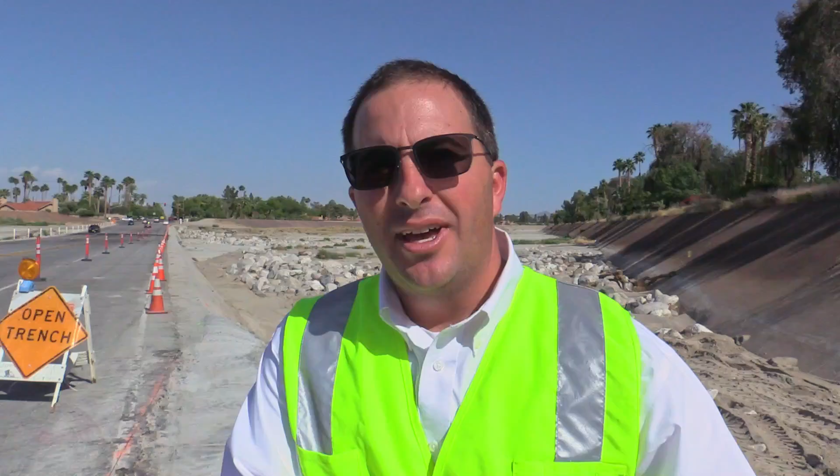Hi everyone, my name is Jesse Eckenroth, and I serve as the Public Works Director for the City of Rancho Mirage. Today we're on site at the Whitewater Storm Channel, on Frank Sinatra Drive low water crossing as it goes through the channel.

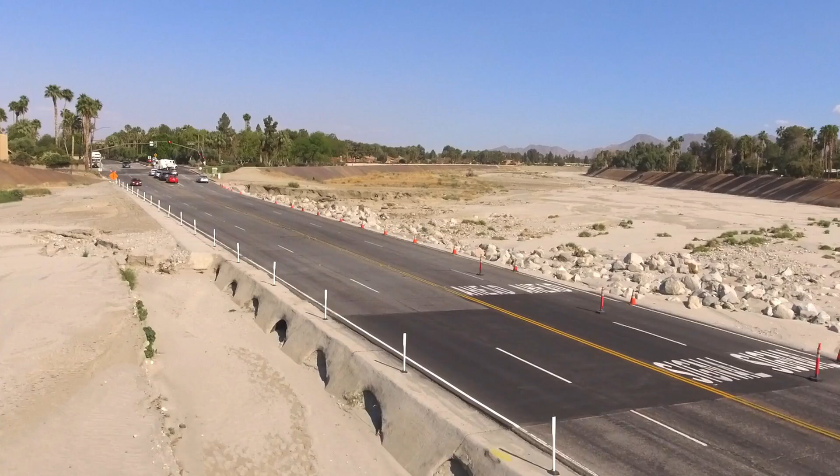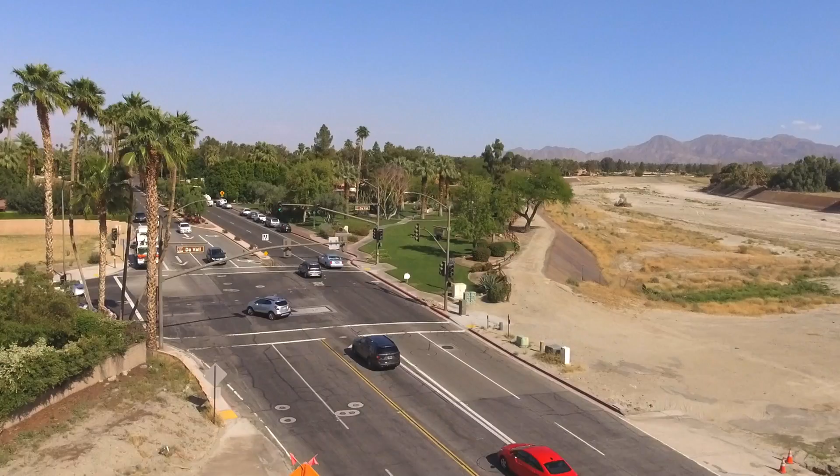Currently there's 16 pipe culverts under Frank Sinatra Drive that convey storm waters during a storm event under the roadway. The recent Valentine's Day flood was too much for the pipe culverts to handle, and Frank Sinatra Drive was overtopped with water. While it was overtopped, it sustained some damage to the roadway, so we thought this was the perfect opportunity to give everyone a status update on the proposed Frank Sinatra Bridge Project. The bridge project will lift the 4 lanes of traffic that run through the channel safely up out of harm's way of future floodwaters.

Valentine's Day 2019, we had some pretty tremendous storms that came through Rancho Mirage, and it put everyone's focus once again on the Frank Sinatra low water crossing, which during major flood events gets overtopped, and the city has to close that roadway down to protect motorists from driving over that low water crossing. So good timing to give an update on the Frank Sinatra Bridge.

I wanted to touch on the current design and funding status as of March 21st, 2019. My name is Jesse Eckenroth. I serve as the Director of Public Works, and I am the project manager for the bridge. So this is just an informational piece really to give everyone an update on where we are standing on the bridge right now.

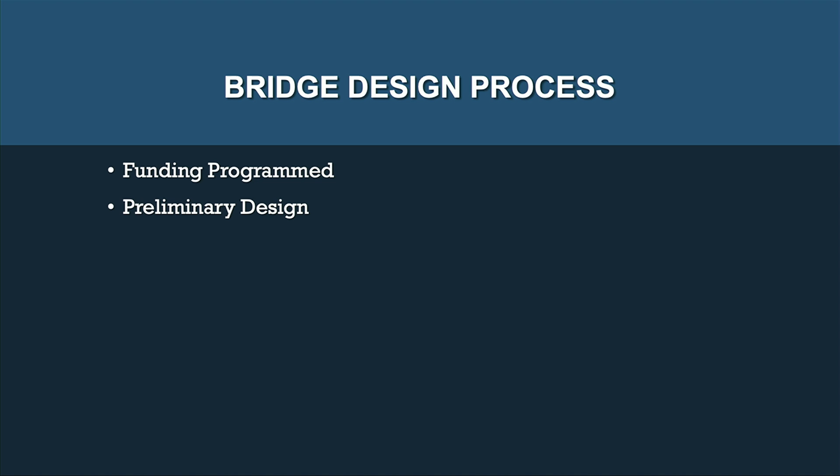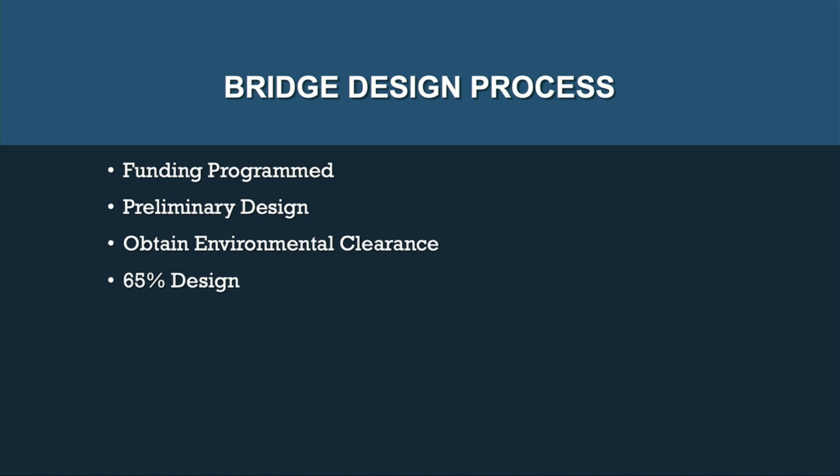There's some major considerations when you're going through a bridge design process. Most importantly, you have to have funding for the bridge, and we do have funding programmed. It's through a federal grant that Caltrans administers, so the funding has been programmed for the Frank Sinatra Bridge. We have completed a preliminary design, we've obtained environmental clearance, so those are pretty major steps in the process. Right now we're around the 65% complete design for the Frank Sinatra Bridge.

We are currently working with CVWD on the hydraulic analysis. The hydraulic analysis studies how the water flows through the channel, particularly right here at our bridge location. And the reason you do the final hydraulic analysis after the bridge has a 65% design is because the hydraulic analysis interplays with the bridge. Depending on where the footprint of the bridge is, how many columns are supporting the bridge, that impacts the hydraulic analysis. So we're at a point where we can model that hydraulic analysis.

After the hydraulic analysis is complete, we'll move to 95% design. We'll begin to acquire right of way as we go through the 95% design plan phase. We'll come to a final design, issue a request for proposal. We will award the project and then construct. So from the city's perspective, these are the major processes we go through before we actually begin construction on the bridge.

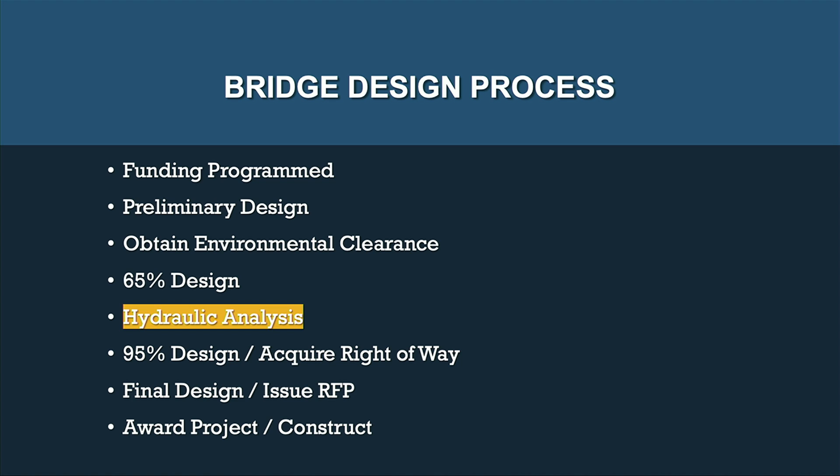So the point of this presentation is to focus on how the water moves through the channel. We're at a point right now where we're going through that analysis with CVWD, and how the water flows through the channel at this location and what it does to the channel bed has a large impact on how that bridge is designed. So right now we're actually under some revisions because of the hydraulic analysis and how the water moves through this section of the channel and how it affects the structure of the bridge and the other structures within the channel.

So when we talk about hydraulic analysis, there's really 2 main criteria that we focused on. One is water surface elevation, and that relates to the channel having the capacity to carry the storm waters through the channel without overflowing the banks. The second critical aspect of hydraulic analysis for our bridge is what we call SCOUR, or what you might commonly refer to as erosion. When you go through the SCOUR calculations and analysis, it's really determining whether the structure of the channel and the facilities within the channel can remain uncompromised during these major storm events where you get significant erosion through the channel.

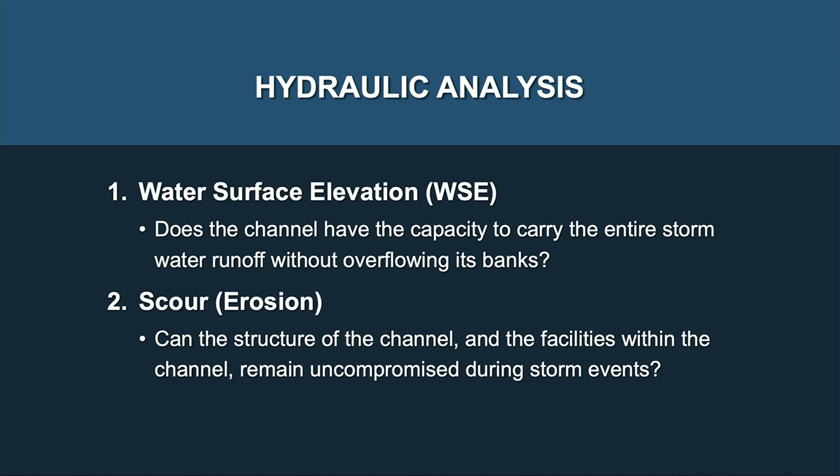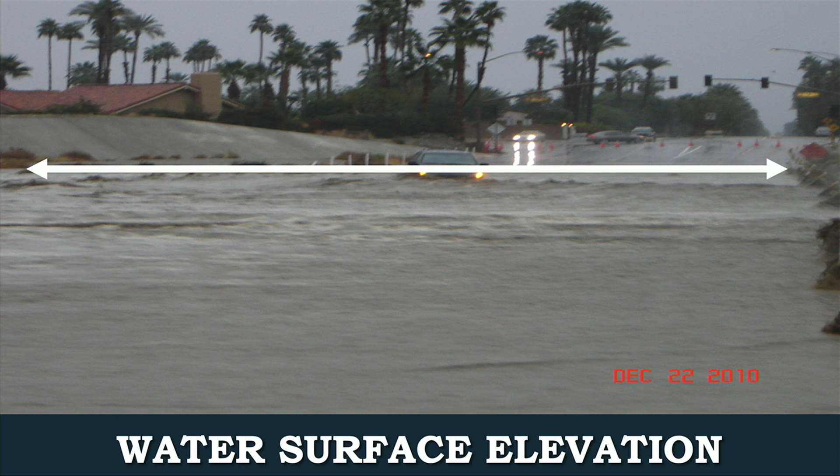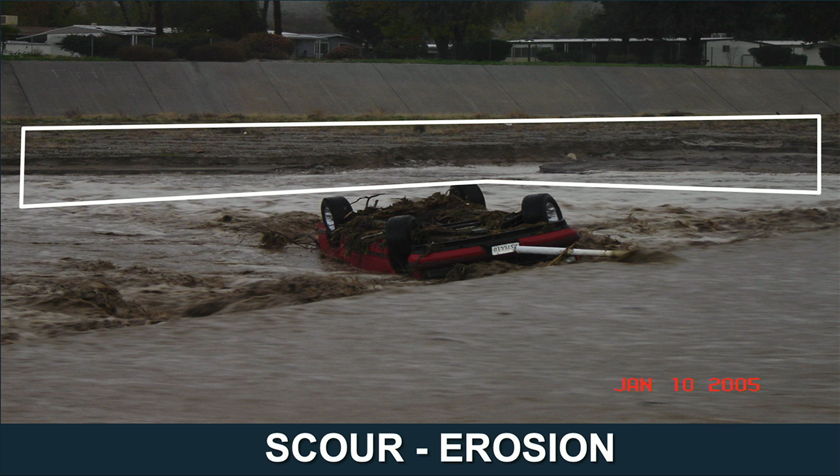It is on the downstream side of Frank Sinatra, upside down in the wash there. But when we talk about scour, what you can see highlighted in that white box is the erosion on the bank. This is an important consideration when designing a bridge structure, because you want that structure to withstand significant erosion, so that should there be a major flood event with extreme scour erosion around the bridge, you don't want the bridge to fail. That's some of the key criteria we're going through with CVWD right now to finish the design.

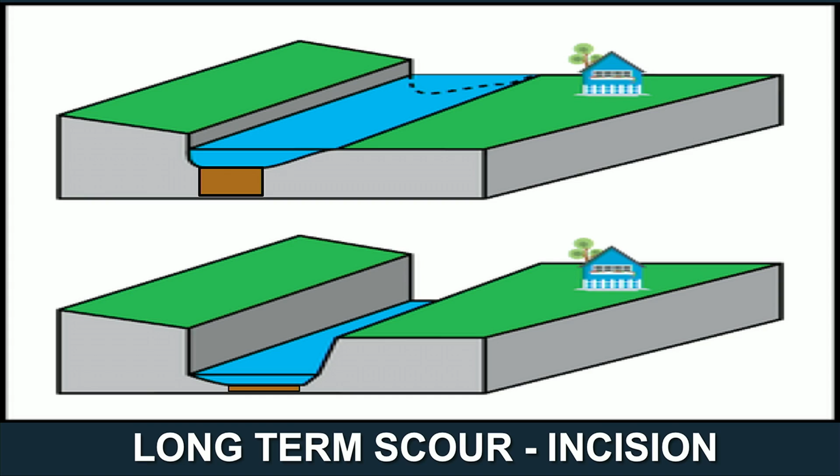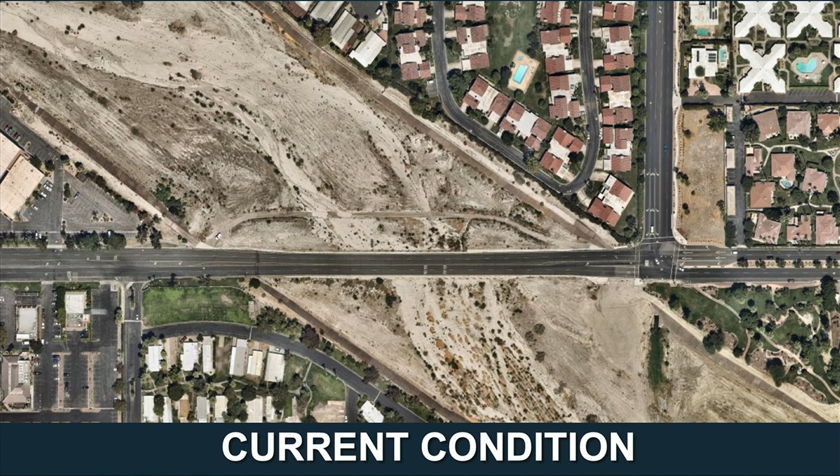So the current condition of the channel right now - this is an aerial image of Frank Sinatra, where the T intersection is Duval coming into Frank Sinatra. You can see the natural flow that goes down through the channel, a little more sandy where the water naturally flows through. There are some culverts under Frank Sinatra low water crossing, and in most storm events, the culverts under the asphalt pavement will convey the water from upstream to downstream without overtopping the roadway. But in a major storm event, those culverts often get clogged and the water will overtop Frank Sinatra low water crossing.

So the current condition we see right now out at Frank Sinatra is what's called aggradation, or this speed bump effect. Right now, Frank Sinatra sits a little bit higher than the wash, so when water comes down the channel, the low water crossing acts as a speed bump. The velocity of the water slows down, the sediment in the water drops out, and it starts to create aggradation where the channel bed comes up to an equilibrium point equal to the top of the roadway.

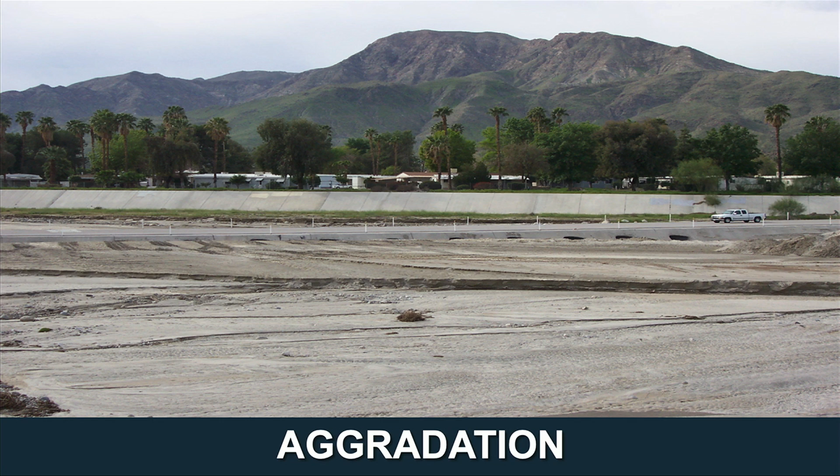Here's another picture of the aggradation, a little further back. If you take the channel bed elevation at the bottom of the screen and extend it out, you'd see it's pretty close to the top of Frank Sinatra low water crossing. That's a result of the crossing being there - it slows the water down in a storm event, the sediment drops out and starts to collect and stack up upstream of this low water crossing. Ultimately, the equilibrium point would be that soil stacks up all the way back to the next grade control structure, which is at Date Palm Bridge.

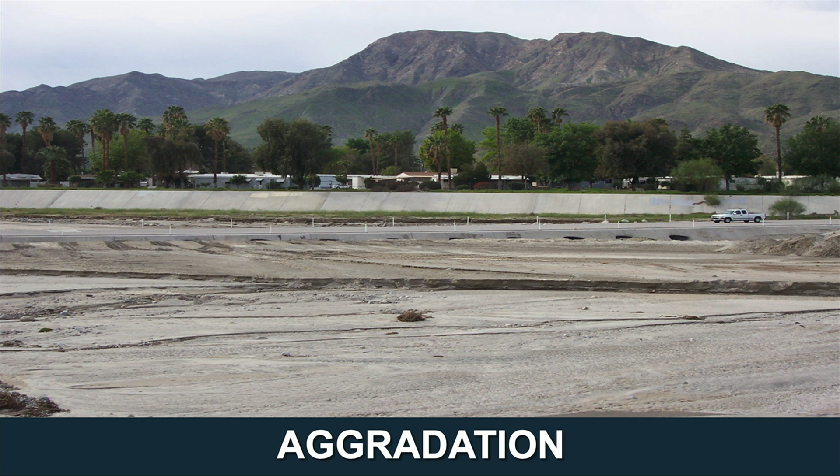As the city and CVWD have been reviewing and modeling this hydraulic analysis, the city has made an argument that the bottom of the channel is really below the top of Frank Sinatra low water crossing, while CVWD's stance is that the channel bed is at the top of Frank Sinatra low water crossing. This is ultimately the channel bed - the height of the channel bed will dictate the height of the bridge.

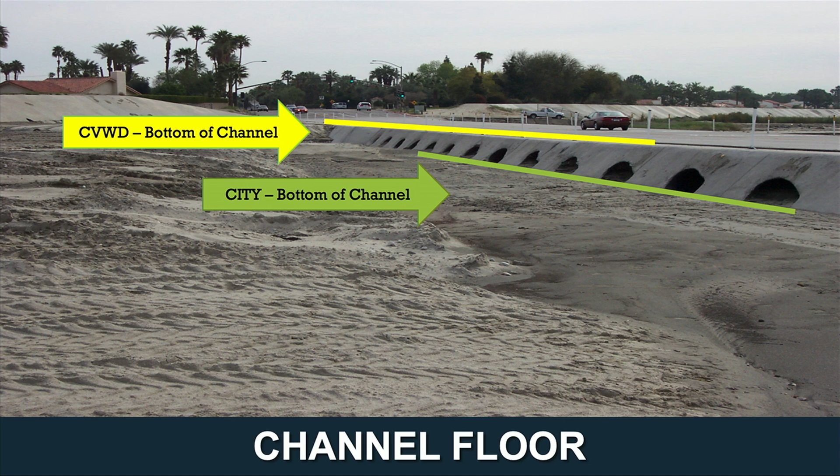There has to be capacity for 47,000 cubic feet per second to flow under the bridge, so depending on where the bottom of the channel bed is, it's going to push the bridge up or down accordingly. The city has gone through analysis and made an argument that the channel bed is really lower than Frank Sinatra low water crossing, while CVWD has taken the stance that the channel bed is actually the top of the crossing. As I stated, this is important for us because we have to consider the height of this bridge.

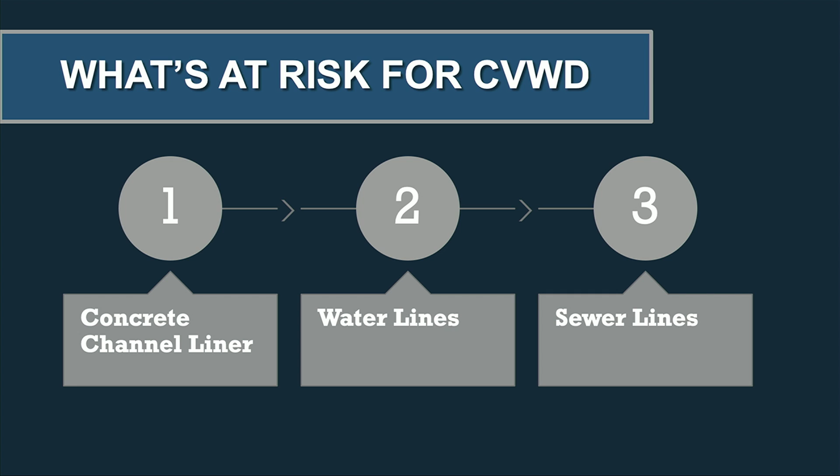That is the concrete bank lining that you will see on most of the channel, especially in Rancho Mirage. Second, there's water lines that run through the channel. For Frank Sinatra Low Water Crossing, there's actually a 24-inch main water line that runs just north of that low water crossing. The higher the channel bed is, the more protection that water line has on top of it. And the third thing that runs through the channel that CVWD is responsible for maintaining are sewer lines. So those 3 things are very critical to everyday services and to maintain the structural integrity. The channel liner is very important for the structural integrity of the channel. So the higher the channel bed is, the more protection those three facilities have within the channel.

So this is just a typical section of what a channel liner looks like. This is straight from CVWD's website. This is a very typical drawing of what you're going to see on the sides of the channel. So what's being highlighted right now is what you would typically see on the side of a channel as you look into the channel. In Rancho Mirage, in many places we have these mottled brown color, so you'll see the sides of the channel looking brown.

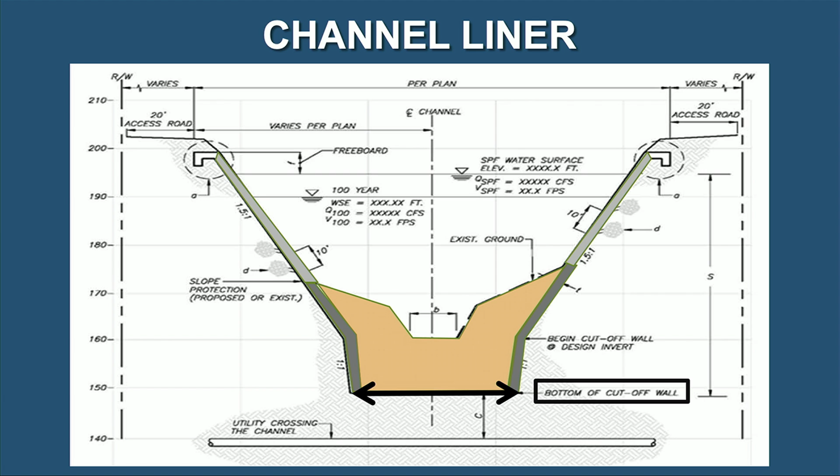What's being highlighted right now is representative of the channel bed, that's just the soil, that's the channel bed, and the channel liners actually extend down past that, shown in dark gray highlights. You don't see how far the channel liner extends down because the soil covers that up. So what CVWD is trying to protect when we talk about erosion is the bottom of the cutoff wall. Where this arrow's at the bottom of the wall, that's what CVWD wants to protect from erosion. So if that bottom of the cutoff wall is ever eroded or scoured so deep that there's nothing to support it, the structural integrity of that channel liner would be compromised. So the higher the channel bed is, the more protection the bottom of the cutoff wall has. The lower the channel bed, it reduces the amount of protection that's in place when a storm comes through and has significant scour.

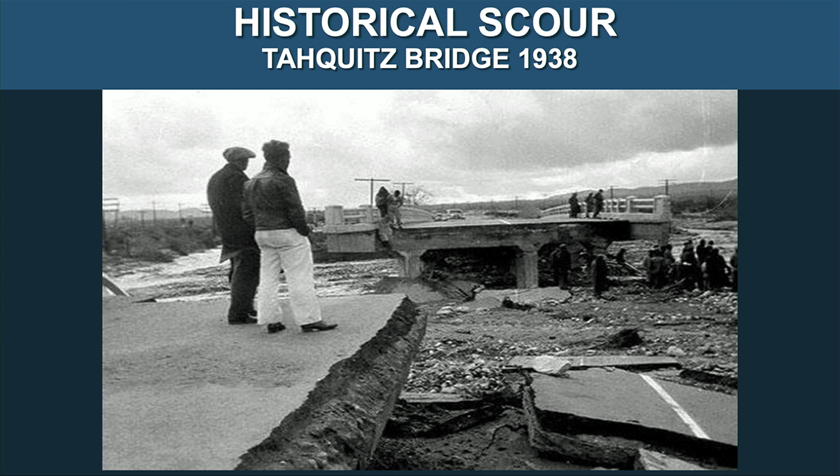Here's a picture, Tahquitz Bridge, 1938. You can kind of see at the bottom of the screen, there was significant erosion that occurred and undermined the roadway. You can see a piece of the roadway on the bottom right of the screen just laying, maybe 6 or 8 feet lower than the section that the gentlemen on the left are standing on. So this is a result of erosion coming through the channel.

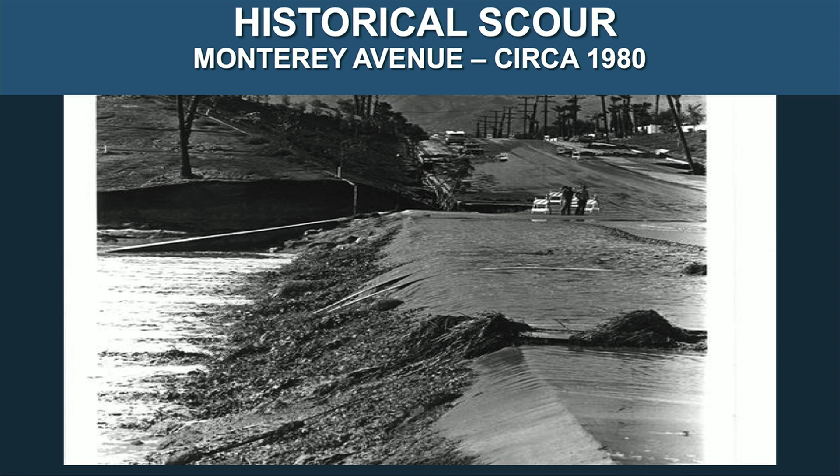This is another picture circa 1980. This is Monterey Avenue, and you can see at the top left, the bank there has probably 6 to 8 feet of erosion as a result of the storm coming through and just eroding that soil. So most recently, the Jefferson Bridge in 2010 had a pretty significant scour event that came through.

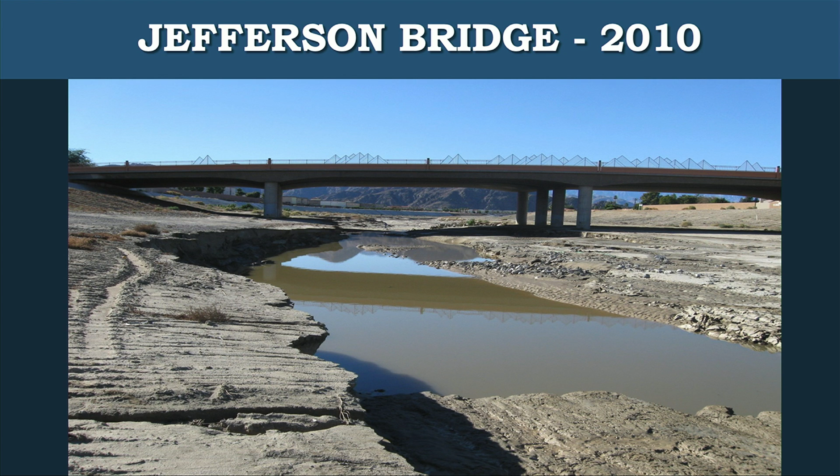This is Jefferson Bridge, where a live sewer line was exposed. Going back to this picture, it doesn't look tremendously eroded, but it was enough to expose this sewer line. The top of the channel bed before the storm was around this elevation, but as the storm came through and eroded, it scoured this section out, exposed the sewer line, and split it up. Now the condition we had was a live sewer line spilling into the channel.

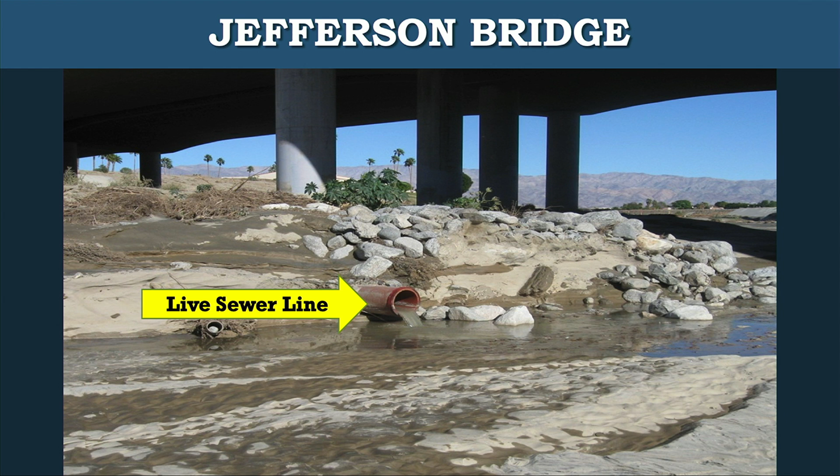This is another thing CVWD obviously wants to protect from happening again. Here's a picture of these clay pipes laying in the channel. These were all connected before the storm, but as the storm came through, it undermined the pipes. They separated and ended up spread out throughout the channel.

To protect this type of infrastructure failure from happening again, CVWD is developing new guidelines to protect against infrastructure failure caused by erosion from storm events. So they've proposed some mitigating infrastructure for our project: one is a grade control structure, two is the extension of concrete channel lining. When the Jefferson Bridge repairs took place, they actually implemented a grade control structure and a concrete liner.

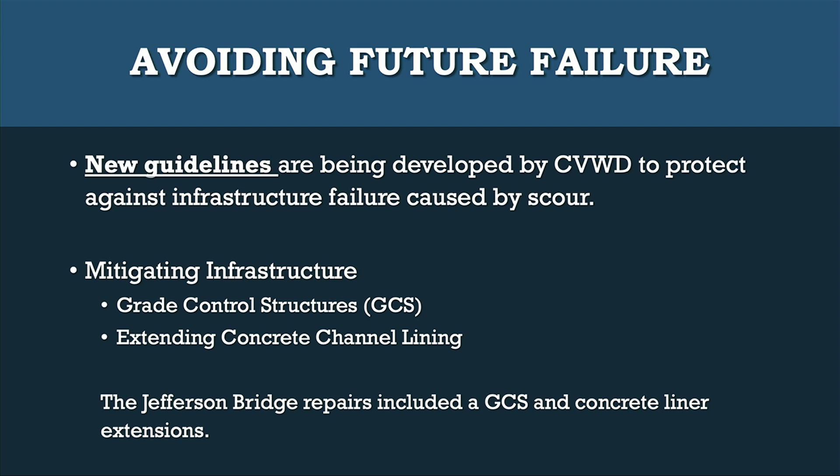So post the storm event coming through, these are some of the pictures of what CVWD went out and did at the channel to make sure it was protected from this happening in the future.

Here's another picture, as it goes across the bridge, it acts as a grade control structure. It's going to look like another channel liner, but this actually acts as a grade control structure, or a speed bump, to slow the water down so that upstream of the bridge the water is going slower and the soil actually stacks up upstream of the bridge instead of eroding away.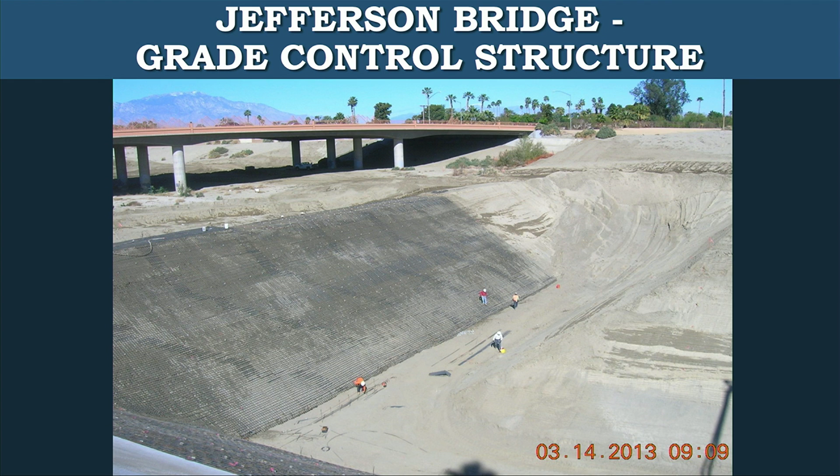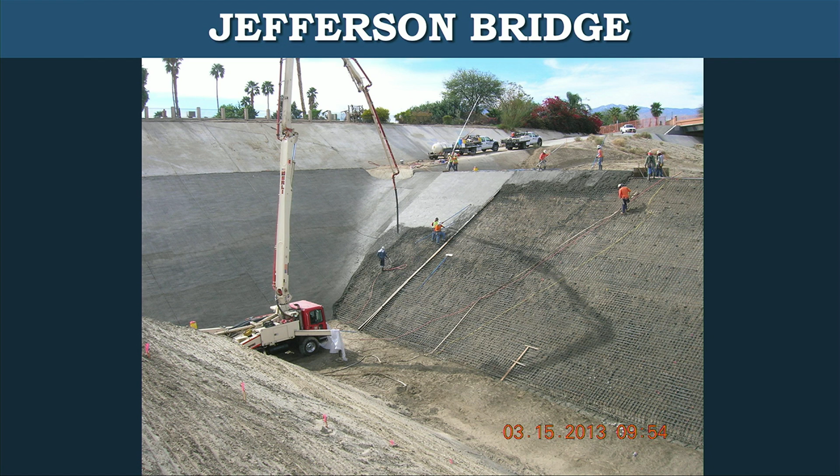Here's a picture of the boom truck filling all this rebar up with concrete. Again, this just gives a sense of the scale of the project CVWD performed to keep this type of failure from happening again.

Once the grade control structure and channel liners were extended, this is still downstream of the bridge, protecting the mid-valley pipeline that runs up through the channel. This isn't a picture of the sewer line that was broken earlier, but they're putting articulated concrete block on top of the water lines, and this will all be backfilled with probably 20 or 30 feet of dirt.

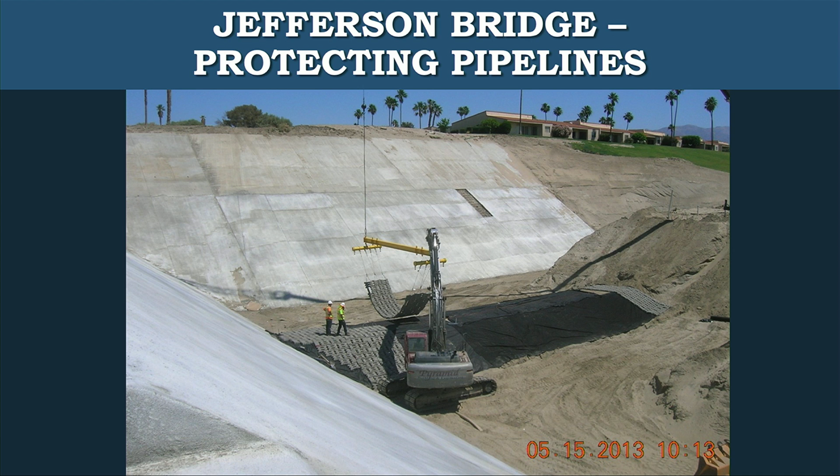This is the Jefferson Bridge. Again, this picture gives some scale of what's going on here. There's a bulldozer in the forefront, and in the background are two large scrapers, very large pieces of equipment. They are starting to backfill the articulated block, and then they're going to backfill and cover all the extensions of this concrete channel liner.

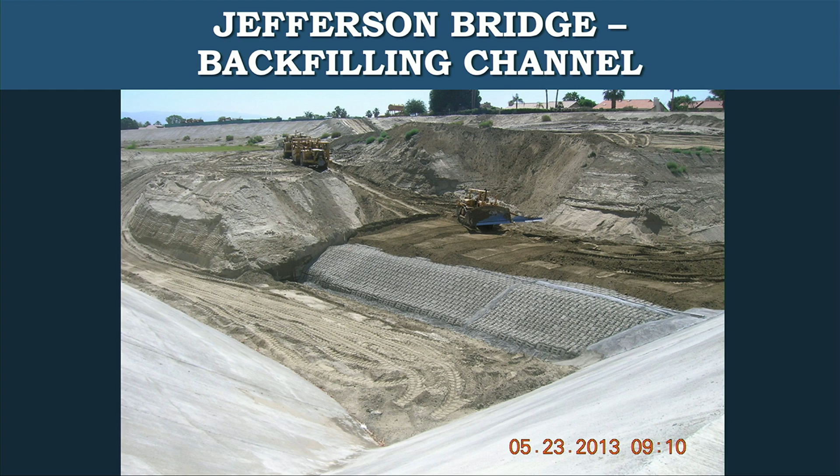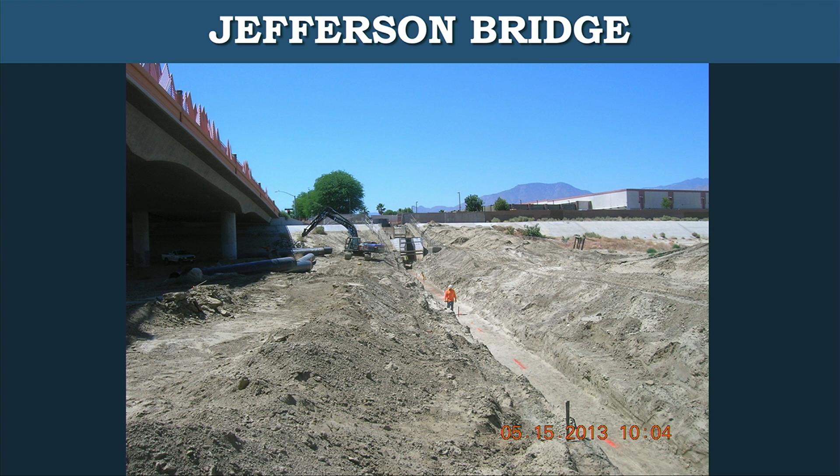This is upstream of Jefferson Bridge, where that sewer line was broken. So they've dug that out and excavated an area here to put a new sewer line in. The picture here shows the new sewer line that's going in.

The blue pipe is what's going to carry sewer water, and around it is a steel encasement that comes in halves. The bottom half is what the sewer line is sitting on, and it's kind of red underneath. Then the other half of that steel casing gets put over the top of the sewer line, it gets welded on, and then they shoot sand in between the blue sewer pipe and that steel encasement.

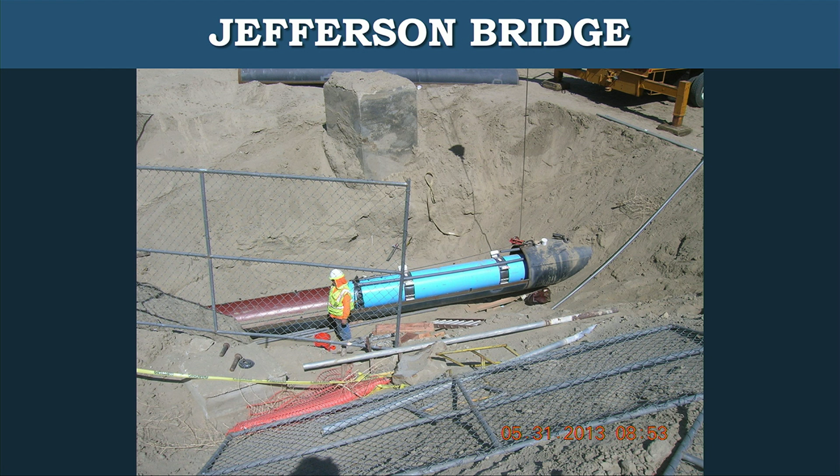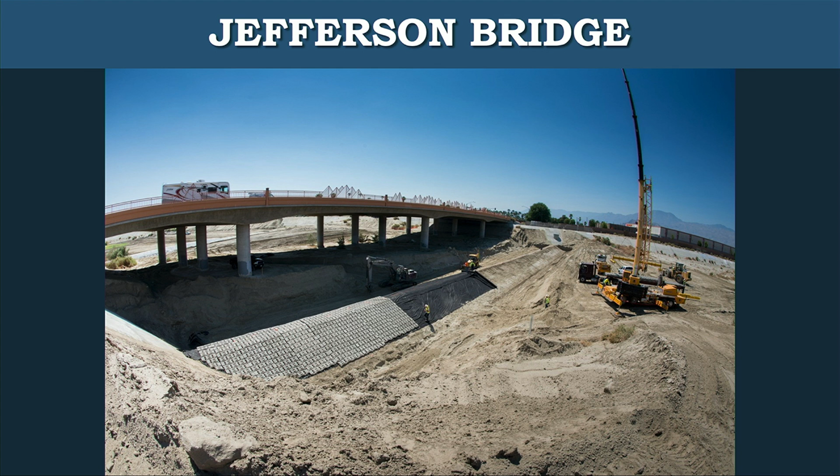So, rather significant infrastructure improvement here on the upstream side of the Jefferson Bridge. This is after the sewer line was put in. They backfilled it with dirt, compacted it, and again they're putting articulated concrete block on the upstream side of the Jefferson Bridge. Here's a picture of some articulated concrete block being laid on top of the sewer line.

So pretty extensive repairs. They basically had a project in the front here to take out the old sewer line, improve the style of sewer line that went in, and then on top of that, put articulated concrete block on it. Then on the downstream side of the bridge, what we looked at was that grade control structure.

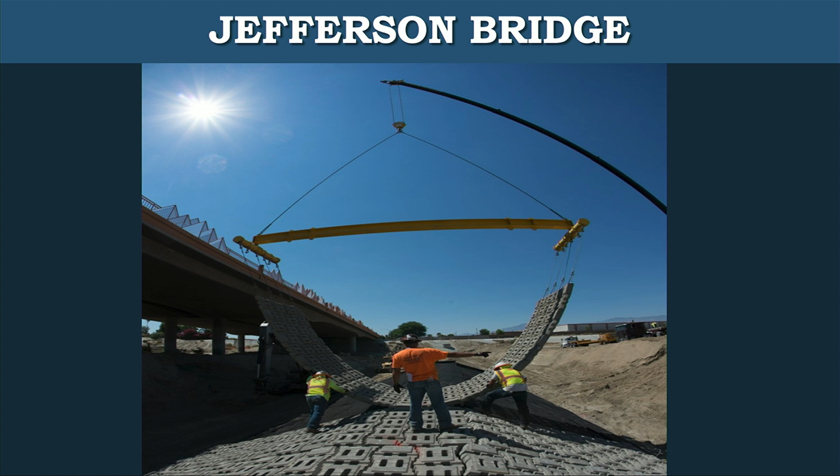That was constructed to keep this section here from ever having any type of significant scour. This is a picture, again, with all this infrastructure gets backfilled with soil, so you don't even see any of the articulated block, you don't still see the steel encasement. Again, these are very large pieces of equipment that don't look that large given the scale of this project.

So this is post the improvements. This is obviously Jefferson Bridge downstream. We're looking upstream, so where the grade control structure arrow is at, that's on the downstream side of the bridge. One important note here is that as the water goes over that grade control structure, the water surface elevation drops. As the water goes over the grade control structure, it gains velocity as it goes over, and the water surface elevation drops. This is an important component and consideration that we are going to use for our proposed grade control structure for Frank Sinatra Bridge.

So here's post the improvement. That highlighted area there is what's left. That's what you see after the storm's gone and all that concrete was poured. This is all that you really see in the channel. So it almost looks like a channel bank, but instead of running parallel to the channel, it's running perpendicular to the channel.

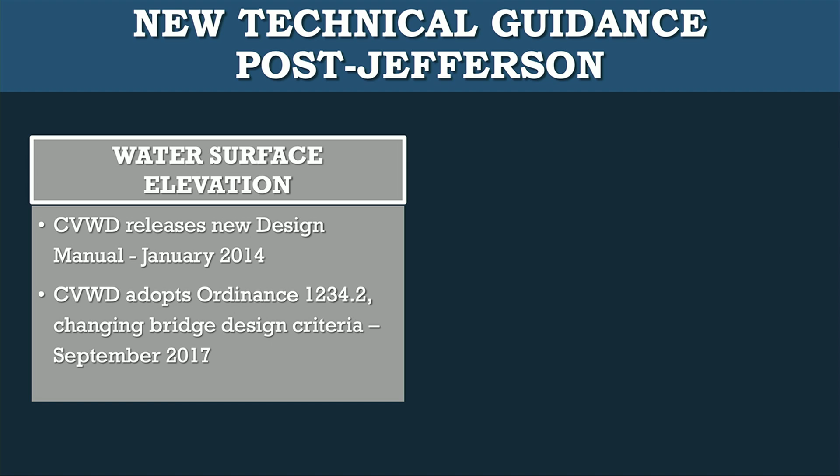We get these changes from CVWD as a result of them trying to protect the channel and the infrastructure in there. But it's causing us to go back and really revise a lot of our hydraulic analysis. The other thing that was changed post-Jefferson was the scour guidelines. CVWD replaced their adopted scour guidelines with draft guidelines in 2017, and those guidelines obviously affect how the bridge is designed and built.

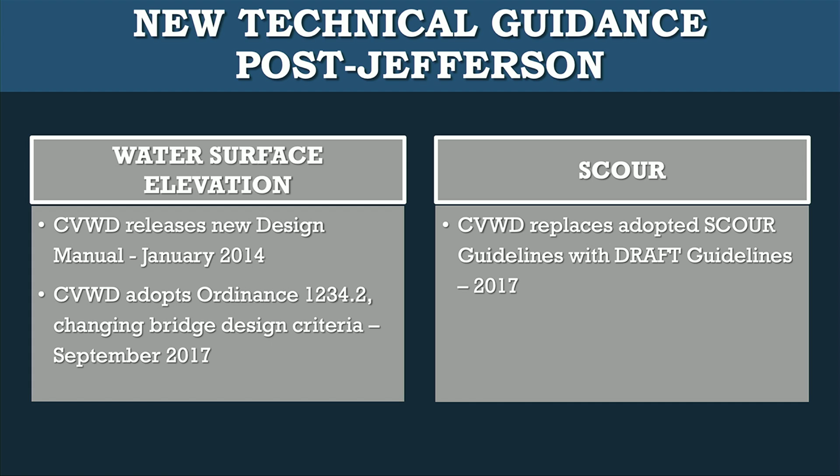So how has the new technical guidance affected the Frank Sinatra Bridge? Well, obviously, the observation of Jefferson Bridge encouraged CVWD to establish new guidelines for anything that crosses the Whitewater Channel. The Frank Sinatra Bridge will cross the Whitewater Channel, so our bridge design is going to be affected by these new technical guidelines that are being rolled out by CVWD.

So the city submitted hydraulic modeling to CVWD beginning in as early as 2013. We've submitted in 2014, 2016, 2017, and even in 2018 we submitted a final hydraulic analysis. But we are currently updating these hydraulic analyses, and these reports are close to 400 to 500 pages, so it's a pretty major undertaking. Based on the new water surface ordinance and draft scour guidelines, we are incorporating those changes and revising some of the bridge design and modeling.

So this is a time-consuming cooperative effort that we go through with CVWD. How it works is the city will get a hydraulic analysis together. We typically will call CVWD, sit down and have a meeting, and we explain the reasoning, rationale, and the principles that we are trying to establish with our modeling submission.

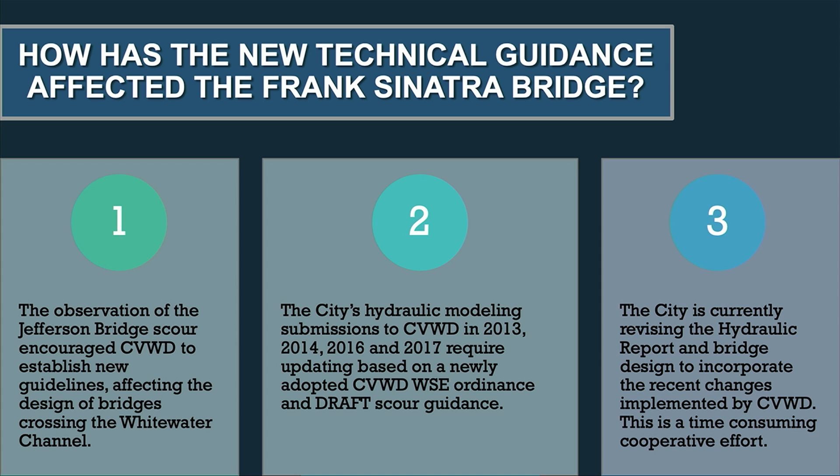We kick them out to our consultant, our hydraulic analysis and modeling consultants, who then address the comments, and then we resubmit them to CVWD. So to go through some back and forth a couple times with CVWD can take some time. This is not a quick and easy type of analysis that's performed, so it's just a time-consuming effort to do that.

So in 2018, we submitted a final channel hydraulic report to CVWD, and we did not recommend a grade control structure. So we propose to increase the capacity of the existing channel by lowering the channel bed, and that was one of the first slides where we had talked about. We thought the channel bed was lower. CVWD has made the stance that the channel bed is actually at the top of Frank Sinatra Low Water Crossing.

And if we were to do that, we'd actually lower the water surface elevation when you compare it to a system that incorporates an above-grade grade control structure. But CVWD did not agree with the method or the results of our 2018 hydraulic report and is requiring the city to implement some type of channel infrastructure improvements beyond what we had originally intended, and that's due to the removal of the Frank Sinatra Low Water Crossing.

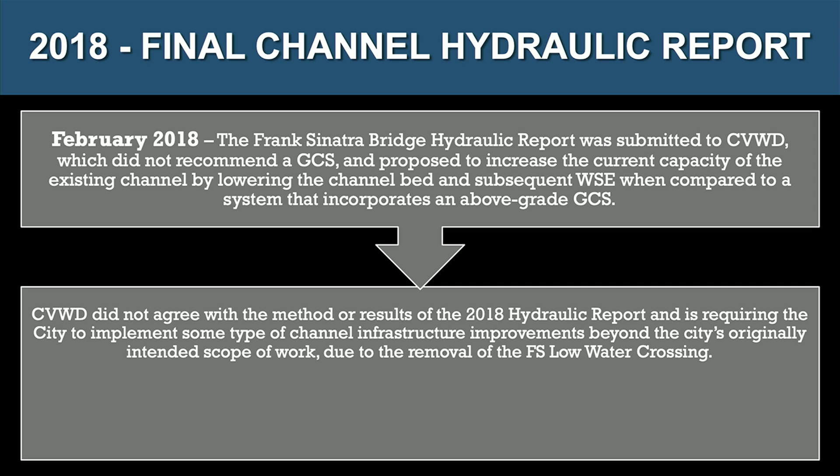So as we remove Frank Sinatra Low Water Crossing to build the bridge, the velocity of the water will not decrease at that location anymore if we don't put some type of grade control structure in, because currently Frank Sinatra Low Water Crossing acts as that speed bump effect that really slows the water down.

So CVWD has asked for a couple things, or the consideration of a couple things. One is a grade control structure. Two is the additional protection of the channel liner, and those are both things that we saw happened at the Jefferson Bridge. And three is that there needs to be some additional protection of a 24-inch water line that's on the north side of the current Frank Sinatra Low Water Crossing.

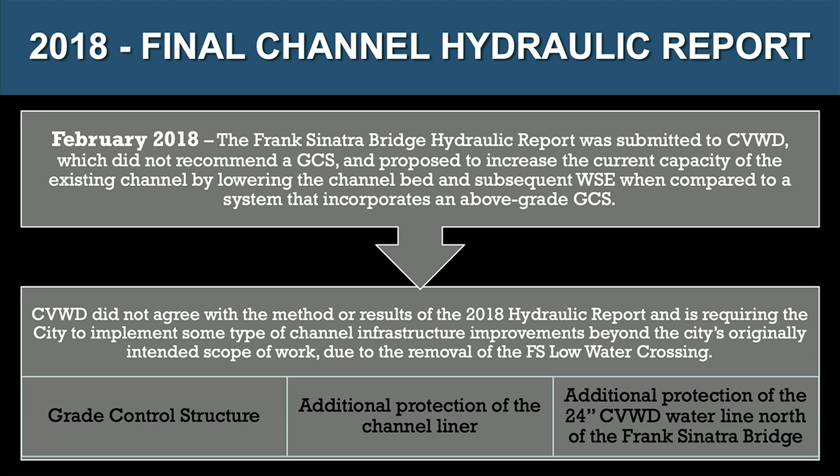So to meet CVWD's requirements, the city has come up with a proposal for a grade control structure that sits underneath the Frank Sinatra Bridge. So as I stated, when the bridge gets built, the current low water crossing, the road that's there, is going to come out, will not be there. Those culverts are going to come out, so it would just be the channel bed. And then what we're proposing is a grade control structure that would go on top of the channel bed.

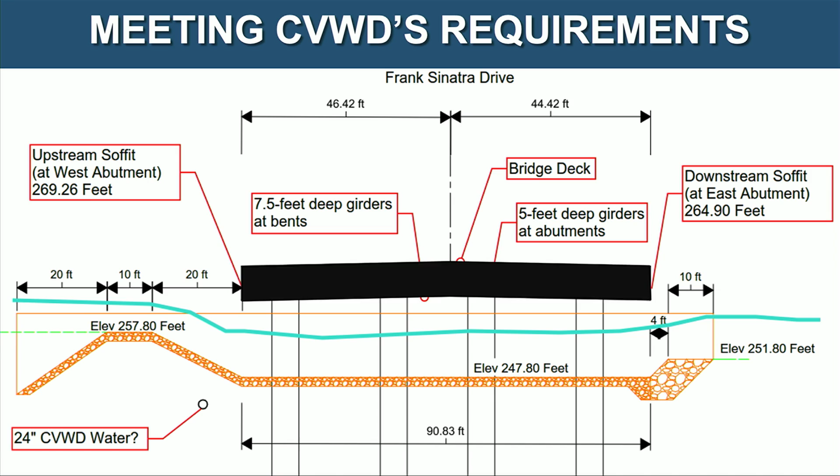So to give you your bearings on where we sit when we look at this, the black that I'm highlighting here is the pavement, so that's the asphalt pavement. The four gray columns are the support columns to hold up the roadway. That blue circle right there is a 24-inch water line that's north of the Frank Sinatra Low Water Crossing.

So that's the upstream side. And then the gray that's getting highlighted right here, that's the proposed grade control structure, a concrete structure that we would pour under the entire Frank Sinatra Bridge. And then it would extend out a little bit on the south, the downstream side, but mostly where it extends out is on the north side to cover that 24-inch water line, so the grade control structure would cover it.

And then the existing channel bed is at the elevation that is highlighted on the left. So the crest of that grade control structure would be even with the existing top of Frank Sinatra Low Water Crossing. So the brown that's on the left there is the soil that's in the channel, and that would be level with the top of this grade control structure.

So the blue that's being highlighted here represents the water surface elevation in a 100-year flood. One important thing to note is that as the water goes over the top of this grade control structure, it actually drops as it comes under the bridge. And as I pointed out earlier, in the Jefferson grade control structure, the velocity of the water increases as it goes over this downhill section. When it does that, it goes through the channel faster, thereby reducing the height of the water surface elevation.

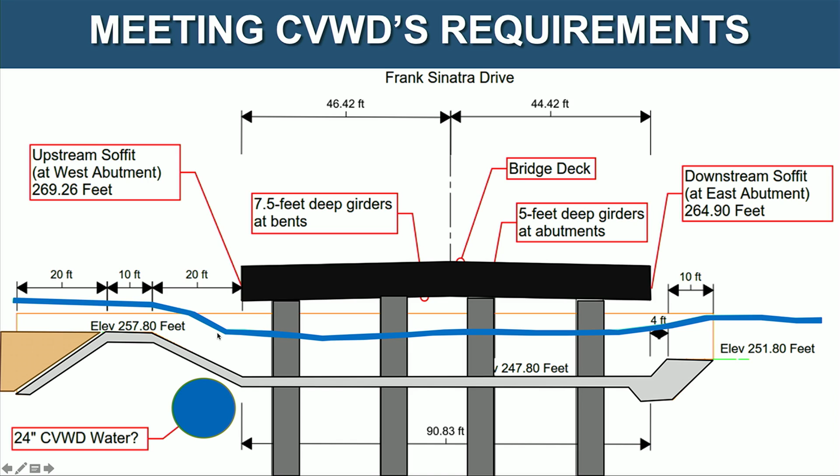So we have a requirement from CVWD to have 4 feet, which is highlighted in red, of what's called freeboard, that's 4 feet of distance between the top of your water surface elevation and the bottom of the bridge. So when height is a consideration of ours, we are trying to be thoughtful in how we build the grade control structure, not only to protect the water line, to protect the channel liner, and to protect the bridge from scour, but we also want to use it to our advantage to make the bridge as low as possible.

So by putting the grade control structure, at least our proposal, on the upstream or north side of the bridge, would do a couple things simultaneously. One is it encapsulates that 24-inch water line, so we would protect the water line without having to do two separate infrastructure improvements.

This grade control structure would protect from erosion and protect this water line. It would also allow the water to drop as it comes under the Frank Sinatra Bridge, and by allowing it to drop, we can get that required freeboard. We can move the water through quickly in the area protected by the concrete grade control structure, and get that bridge to a height that's safe, but not any higher than it has to be. That's some of the reasoning behind why we have a grade control structure design that is not typical.

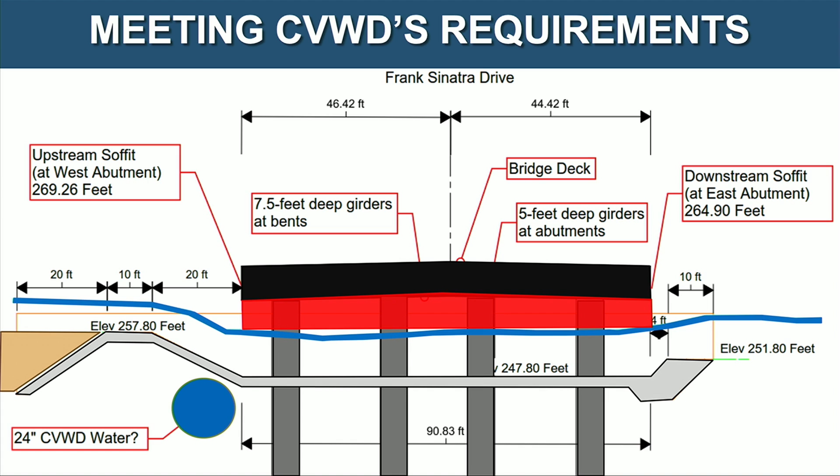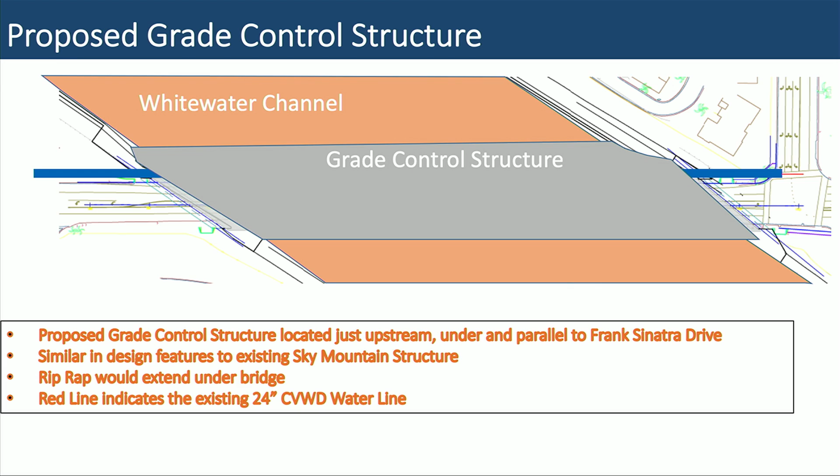To give you some bearings on how it would look in the channel, that represents just the channel bed in the whitewater channel. The blue line is the 24-inch water line that runs through the channel. The grade control structure would go in the whitewater channel over the existing 24-inch water line, and then the Frank Sinatra Bridge would lay over the grade control structure.

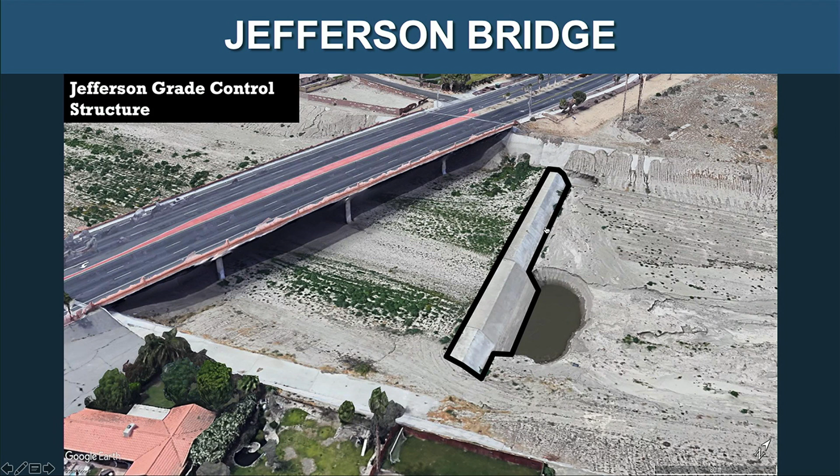Let's click on this and go back to the Jefferson Bridge. You would see something very similar to this, which would probably be Natina brown in our case to match the channel liner, but that's probably very typical of what you'd see on this upstream north side of the Frank Sinatra Bridge. On the downstream side, anticipate there would be a smaller amount visible from the grade control structure as well.

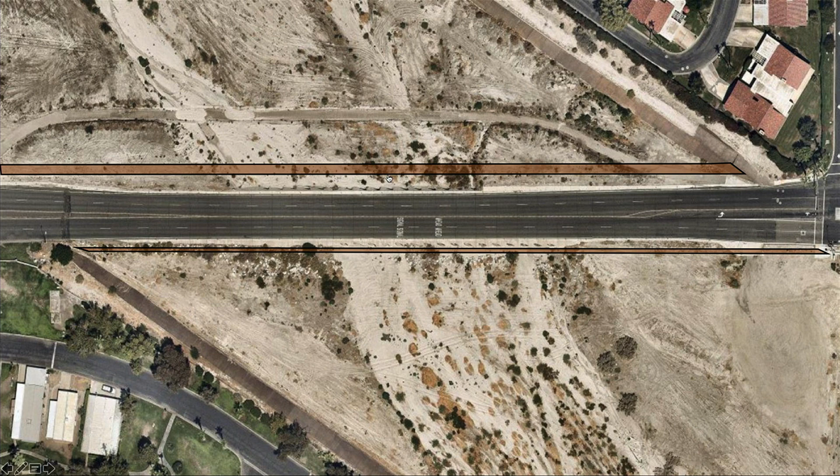There's what's called an end sill at the end of that grade control structure, and it's just a little bump up, almost like a little speed bump. As the water goes under the bridge and hits that bump, it acts as a speed bump and slows the water down as it's exiting the grade control structure. So there's a reduction of scour downstream of the grade control structure.

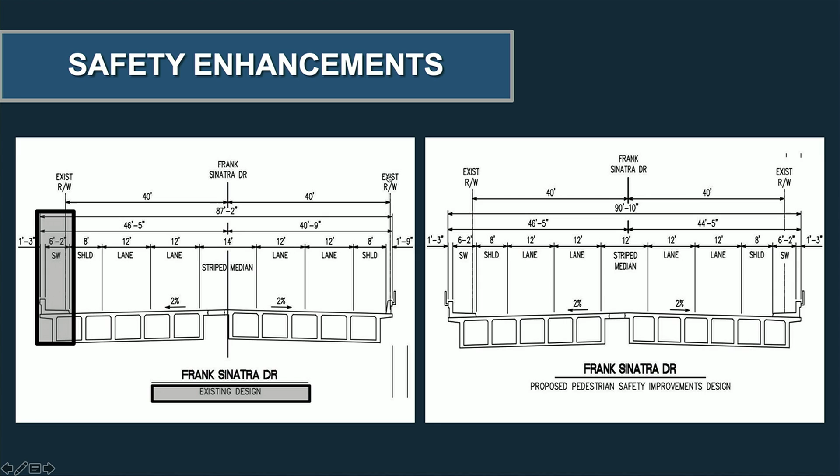In addition to doing some additional infrastructure improvements, we've also looked at some safety enhancements for the bridge. The slide on the left is the existing design, which has one sidewalk on the north side of the bridge. Our proposed design is on the right. We're going to keep that sidewalk on the north side, but we've also asked for additional funding for a sidewalk on the south side of the bridge.

That way, whether you're heading east or west, you would have a pedestrian sidewalk to cross the bridge safely. That's a request we've sent in to Caltrans.

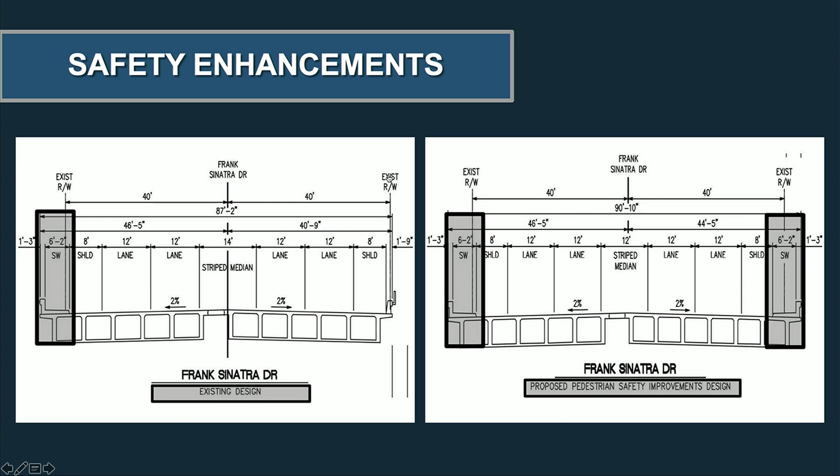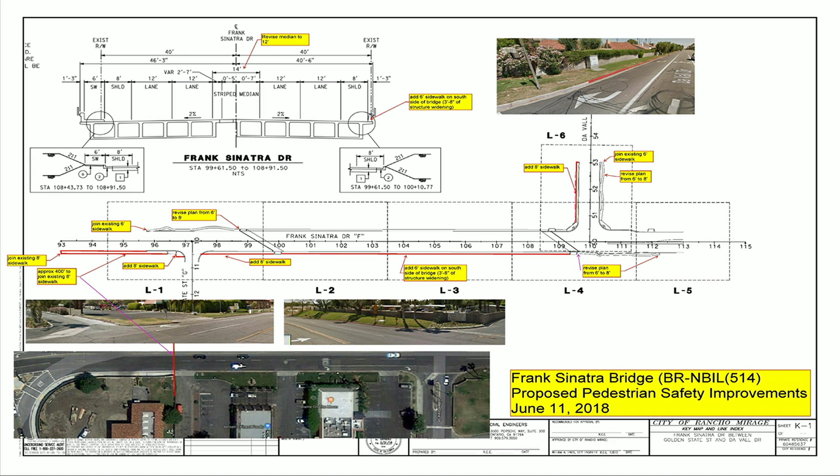So you could go from Wolfson Park all the way to Highway 111 on the south side on a pedestrian sidewalk the whole way. That's the request we've sent in to Caltrans.

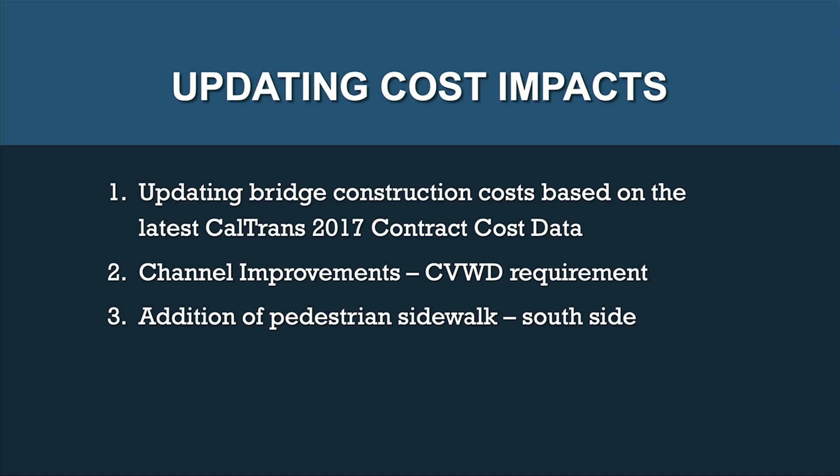So the other kind of update I want to give is where we sit with cost. There's 3 things that we've done to update the cost on this. One, we've used the latest 2017 contract cost data because this bridge was originally submitted in 2010, so there's some upticks in the cost data. We've also gone through some CVWD infrastructure requirements, so there's a cost to do those channel infrastructure improvements, and then the addition of this pedestrian sidewalk on the south side of the bridge.

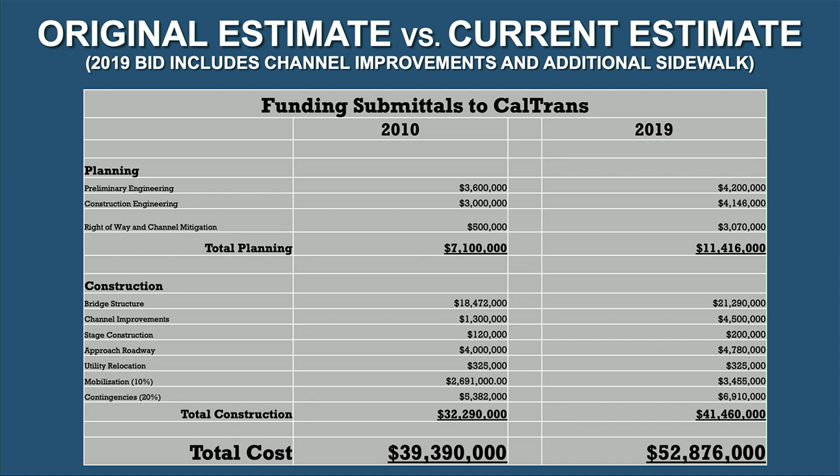So in 2010, we gave a funding submittal to Caltrans of $39,390,000. In 2019, where we sit now, that cost has gone to $52,876,000. And that's a result of using the latest cost data, the channel infrastructure improvements, and the addition of the pedestrian sidewalk on the south side of that bridge.

52 million, almost 53 million is no small number, but fortunately for us, there's a way that is going to be allocated out. So how do we spread out 52, almost $53 million worth of improvements to our city?

Fortunately, this project is a federal awarded project, so we have a grant that currently is going to cover 88.53% of the project cost. It's a federal grant that's administered through Caltrans, so eligible expenses, as of now, are going to be covered 88.53%. Caltrans' portion, they currently have 35 million, almost 35 million programmed, and we're asking for an additional almost $12 million, which would bring the federal grant amount that Caltrans administers to $46,811,000. So the bulk of this project, pending this additional request, is going to be covered through a federal grant.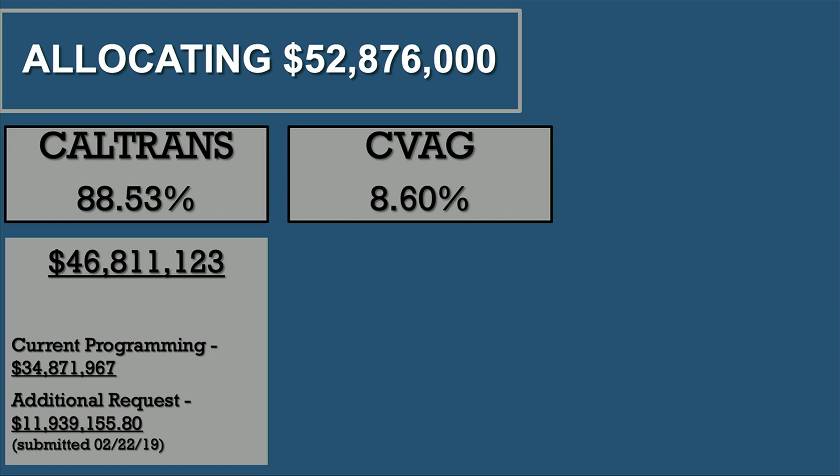What's left? The 11.47% that's left gets split 75% to CVAG, Coachella Valley Association of Governments, and 25% to the local jurisdiction. So 8.6%, which represents $4.5 million, is what CVAG would cover. Currently we have $3 million programmed and earmarked for this, and we'd have an additional request of $1.5 million, and that's to cover these cost impacts we've just discussed. The city's share is 2.86%, which equates to $1.5 million. We have programmed a little over $1 million, so to do these improvements, it would cost the city about an extra $400,000.

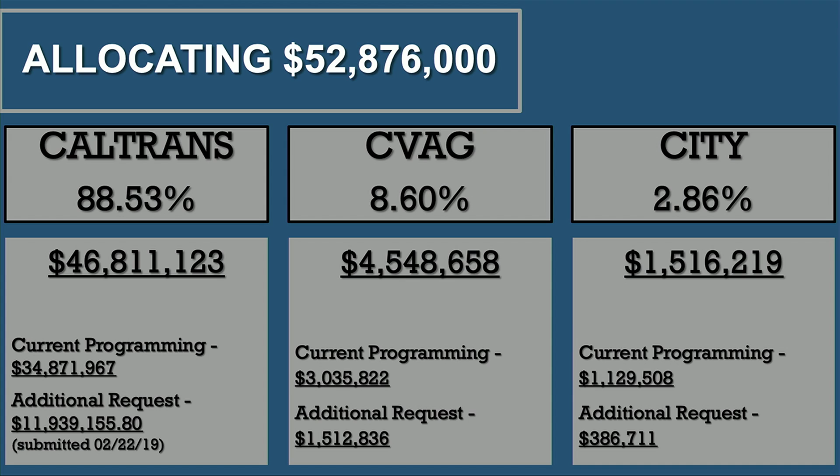So a very substantial amount as far as a project amount. Fortunately, we have a federal grant that covers the bulk of that, and what's left gets split up. So the city's portion, although $1.5 million is substantial, when you look at the total cost of this project, it's not prohibitive. By having these grants and these funding allocations, it allows the city to actually build a project like this. Without a grant, we would never be able to afford a project like this.

So schedule milestones. The schedule on a project like this is, before you're in construction, somewhat elusive and difficult to pin down, just based on how many reviews and how many agencies are involved in the review and the funding timelines. Right now, what we have is a milestone of April 2020 to get our plans to a 95% design mark. And then milestone 02 is to advertise for bids in September of 2021, that's when all the permits are pulled and plans are 100%. So between April 2020 and September 2021, there's a substantial amount of permit process that the city has to go through.

We have to get a permit from CVWD. We have to get a permit from the Army Corps of Engineers. We have to get a permit from the Department of Fish and Wildlife, and we have to get a permit from the Regional Water Control Board. So there's quite a bit of work to do between step 1 and 2. And then step 3 is construction complete, which is September 2023. So these are our anticipated milestones, just to give you an idea of what we're looking at for timeline here.

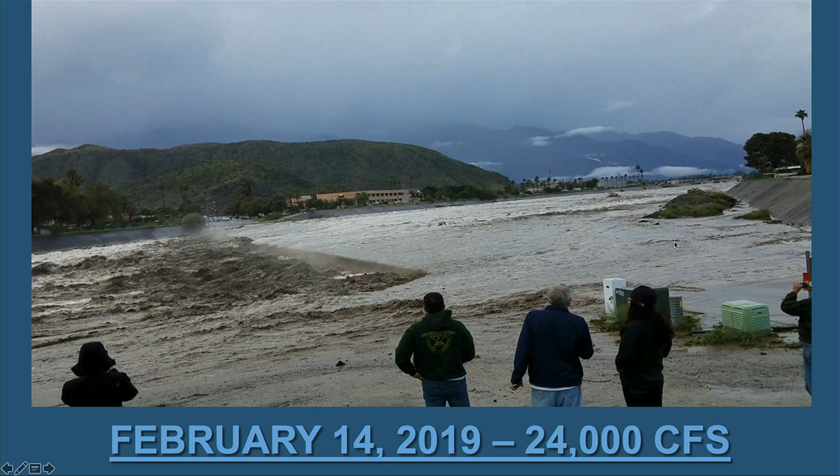So a picture of what 24,000 cubic feet per second looks like was taken on my phone. This was about the time that stream gauge registered 24,000 cubic feet per second.

So I guess the upside to this is that the channel itself and the channel liners are doing a great job at handling this flow of water. This is a tremendous amount of water, and there is still a lot of capacity left in the channel. As you can see on the side, there is still substantial capacity before it would overflow the banks.

You can see the turbulent water on the downstream side of Frank Sinatra Low Water Crossing, causing a lot of the scour and erosion that happens on the downstream side of a grade control structure.

Another notable mention is January 11th, 2005, when there was 8,850 cubic feet per second. Here's a picture of what that looks like going through the channel. That amount of water overtopped Frank Sinatra and created a condition where the road is unsafe to pass.

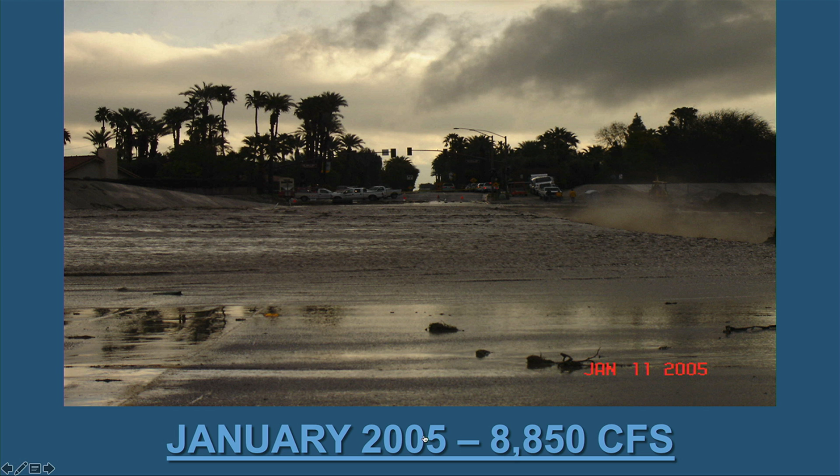The design capacity for Frank Sinatra Bridge is 47,000 cubic feet per second, approximately double the amount of water flowing through during this most recent Valentine's Day flood. In addition to handling that 47,000 cubic feet per second, it has 4 feet of freeboard, that free space mentioned earlier, where the bridge must be designed to handle the flow plus have 4 feet of space from the top of the water surface elevation to the bottom of the bridge.

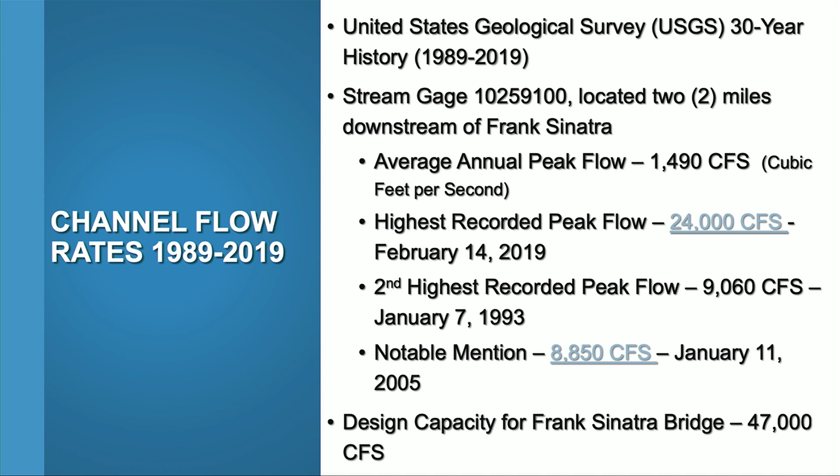So the capacity for the Frank Sinatra Bridge will be tremendously higher than what we currently have with the low water crossing. To get a scope of how big it will be, I did a little survey using aerial imagery of the Interstate 10 bridges between Palm Springs and Indio. I did an approximate measurement with an online tool, so don't hold me exactly to these numbers, but they're pretty close.

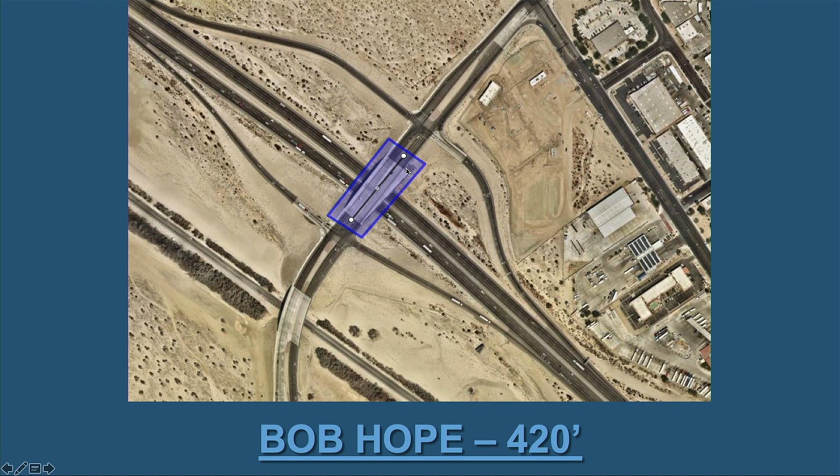On I-10, we have Indian, Gene Autry, Date Palm, and Bob Hope, all around 420 feet in length. Here's a picture of Bob Hope as it crosses Interstate 10. This blue line represents approximately 420 feet, so a substantial bridge.

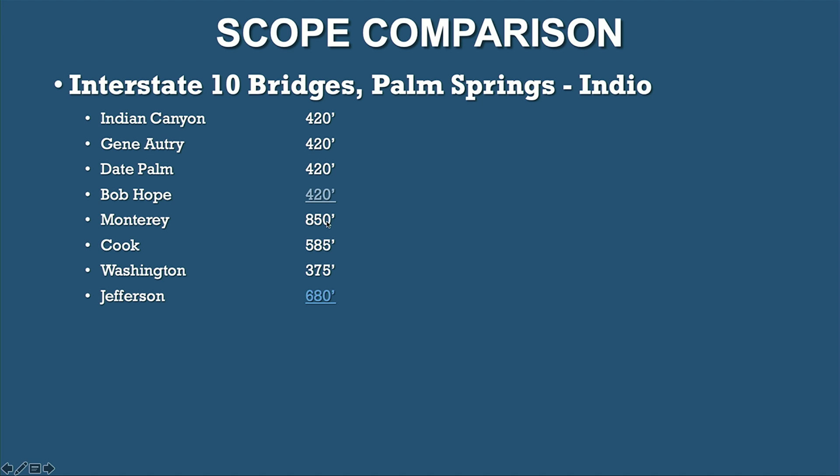The next 4 bridges I looked at were Monterey, Cook, Washington, and Jefferson. 850 feet for Monterey, the largest of all the bridges that go over I-10 in this stretch, and Jefferson at 680 feet. This was recently constructed within a couple years.

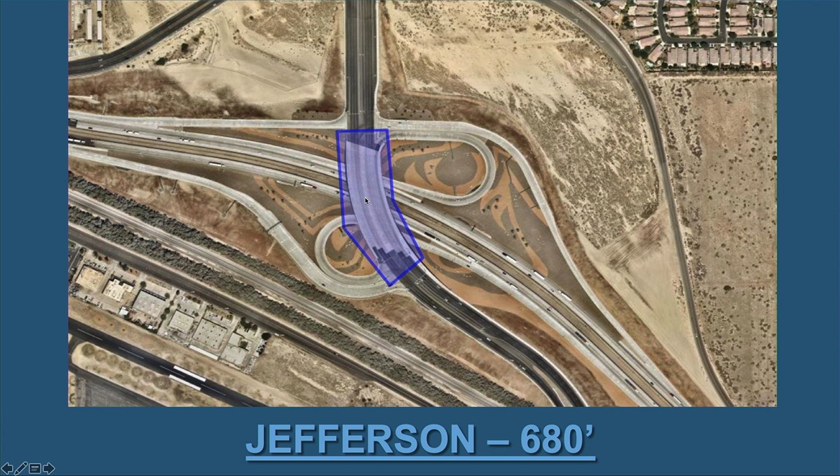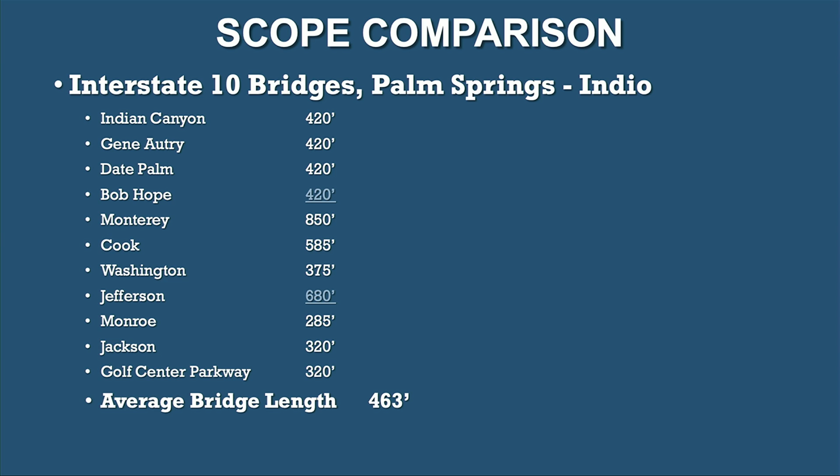Then the last 3 bridges, Monroe, Jackson, Golf Center Parkway, all these bridges 320 feet or less. So the average bridge length for Interstate 10 between Palm Springs and Indio is 463 feet. The Frank Sinatra Bridge is going to be 1,000 feet, substantially longer than these bridges that cross over I-10.

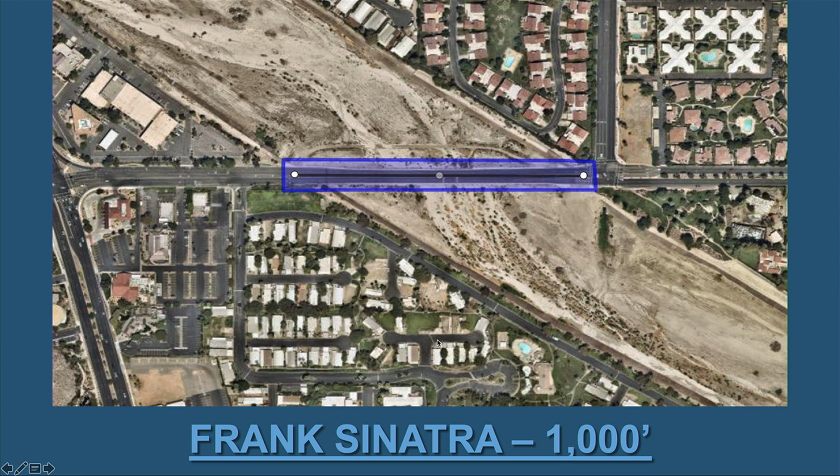One of the reasons Frank Sinatra Bridge is going to be so long is because it's skewed to the channel, not running at a 90-degree angle across it. There's approximately a 55-degree skew here, so it takes a while for the bridge to reach the other side, because it's going across as well as upstream or downstream depending on direction of travel. Although it doesn't seem as grand as some of these interstate bridges, it's actually over twice as long as their average length.

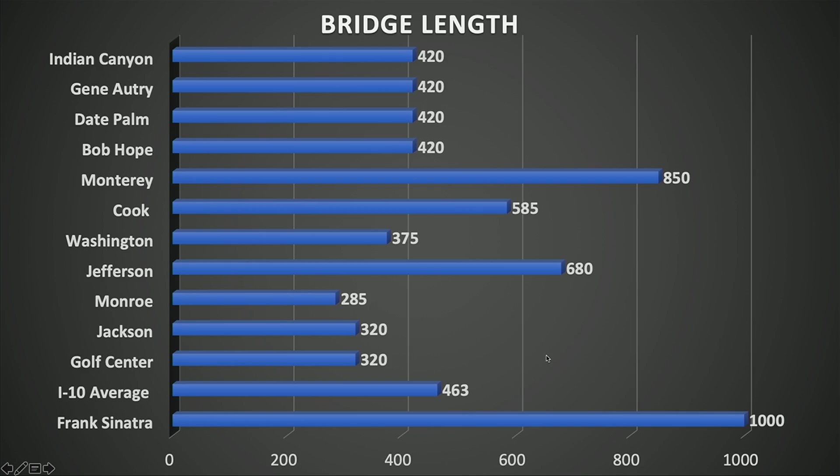There are definitely some challenges with building this bridge over a wash, what the Army Corps of Engineers considers a navigable waterway. Just because it won't be high off the ground doesn't mean it won't be an intense build, at 1,000 feet long, much longer than any bridge that extends over Interstate 10. I hope you enjoyed the status update on the Frank Sinatra Bridge Project.